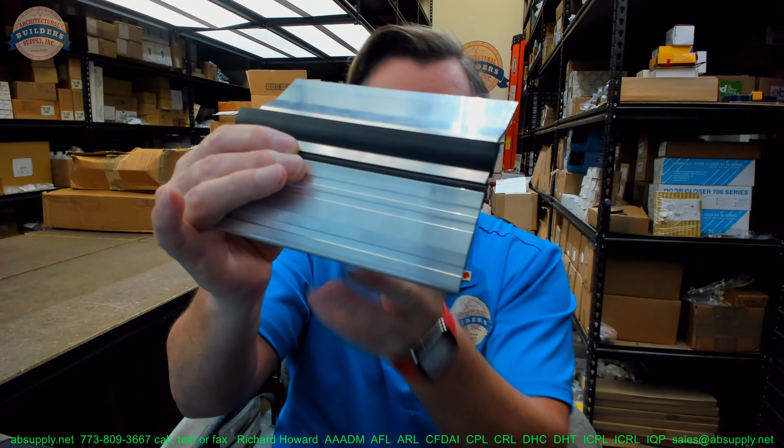This video is to bring you a closer look at the Pemko number 279x292AFGPK. So that's a part number. It's got 279, it's got 292, it's got A, it's got FG, it's got PK. Let's dissect it. So the 279 and the 292 are the constituent parts.

We'll dissect that. The FG happens to be that piece of rigid plastic right here. The A means it's all in mill aluminum finish, and the PK stands for the PemkoPrene insert here. This is what would be called a bump-up style threshold, where you're going to have the door make contact right with the PK or the PemkoPrene that's been inserted there.

This is a thermal break threshold is really what it is. It's a thermal break threshold that is built using constituent components to give you a confluence of the size that you need by utilizing two different parts that have that sort of preparation or that accommodation in the extrusion itself so that it could take that rigid thermoplastic that's here. The point of that is to retard the transmission of cold or heat or moisture from one side to the other. Very commonly used in cold climates.

I am witness to the effectiveness of thermal break weather stripping thresholds, thermal break hollow metal frames, and I can tell you that it's astonishing just on putting your hand on the outside of the frame and on the inside of the frame, or the outside of the threshold and the inside of the threshold. It's astonishing how much of a difference there is in just temperature that you can detect with your hand.

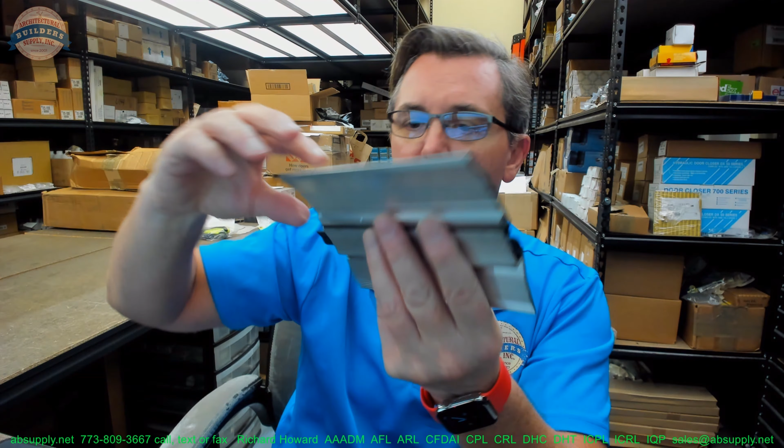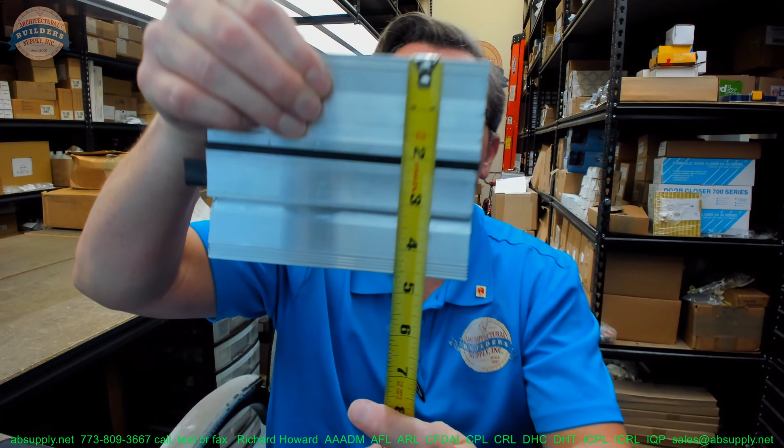Now the question becomes which is the 279 and which is the 292? I'm thinking that's the 292, but we'll take a look at that in a moment. Let's take a confirmation of the dimensional properties of this item. They have it at 4 9/16 overall width. Yeah, I'd say spot on. Maybe 4 5/8. It is certainly an attribute of thermal break thresholds that this would otherwise be 4 1/2 inch or something like that. But they have to make an allowance for that thermal break to be in there.

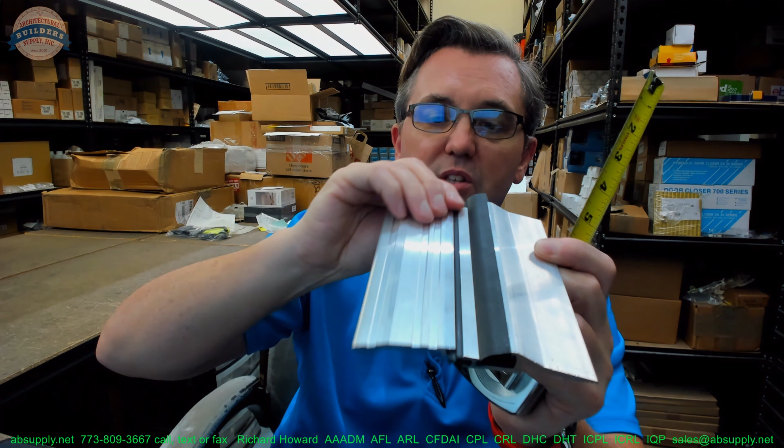Likely, more importantly, is the height. If you have a 3/8 undercut on your door, this could work out very well because the height of this leading edge material is just 1/4 inch. It's going to be 1/2 inch overall height here. So if you, again, have a 3/8 undercut, this could be quite perfect for that application.

Okay, this is also handicap compliant. Yes, it is. It's not listed as, but it meets the criteria for handicap compliance. It doesn't exceed a 1/2 inch height, and the rise over run, actually maybe it doesn't because of that PemkoPrene. You have to have a certain rise over run; you can't have more than a 1/4 inch height that is vertical like that. You have to have a 2 to 1 relationship.

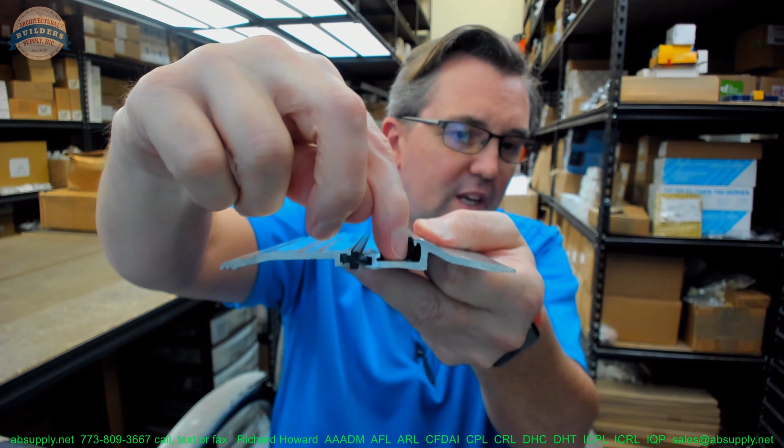And it's not listed as handicap compliant in our description, but we'll take a look at it. It could be if this were to fatigue and fail and no longer be there, that dimension here is what the problem would be. Okay? They're probably not going to calculate that PemkoPrene as a bona fide way to ensure handicap compliance. So we'll include fasteners.

This is listed in the site in lots of different lengths, everything from 2 foot to 8 foot lengths. You can have any custom length that you want, up to 16.5 feet is probably what they have the extrusions in. Be mindful that after you get longer than 3 foot, the length and the cost to ship are on an XY graph, and as the length increases, the cost to ship goes like that. So be mindful. Don't order 8-foot pieces because you want to cut them down to 30-inch each. Just order the size you need.

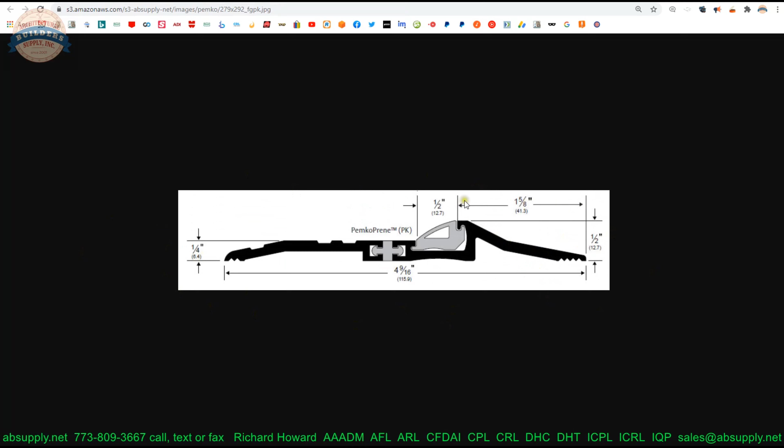Let's switch to the screen view now and take a closer look at the supporting documentation. Here's the item that we are looking at. We have an extended description image here showing all the dimensional properties. A lot of people will ask what that inside dimension is, or conversely what the outside dimension is. They call it a latching panic saddle threshold. I didn't mention that earlier. That's because this threshold is considered a latching panic threshold. And here's why.

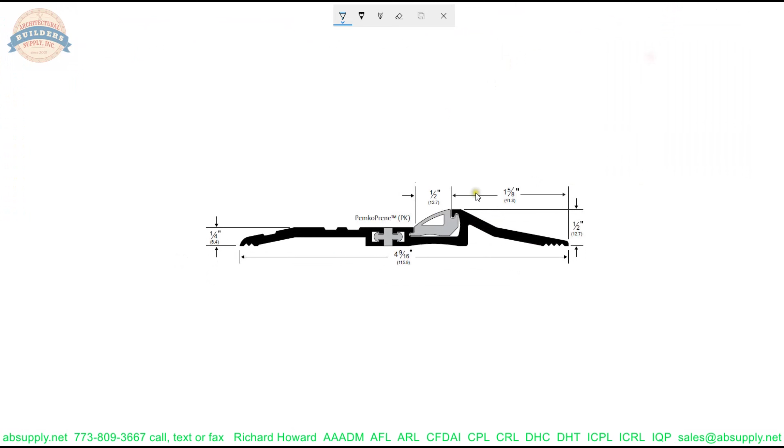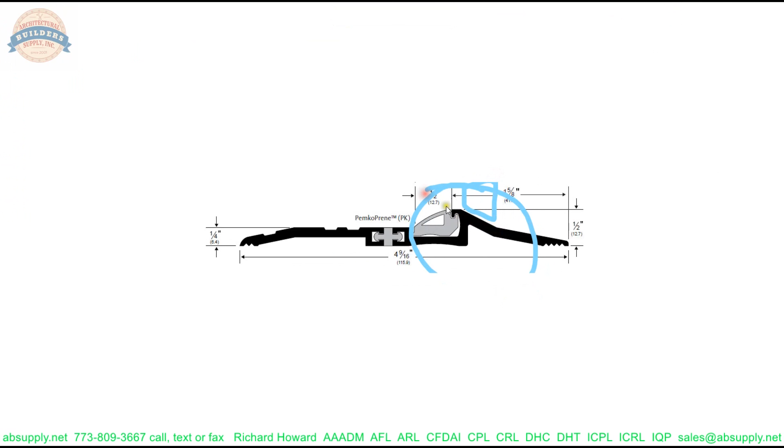If you have surface vertical rod exit devices, you'll have a Pullman latch style treatment here. This area right here can act as an area by which to retain the bottom latch of a surface vertical rod exit device. That's why they call it that, latching panic. So this would be very effective in an exterior application where you have pairs of doors that swing out.

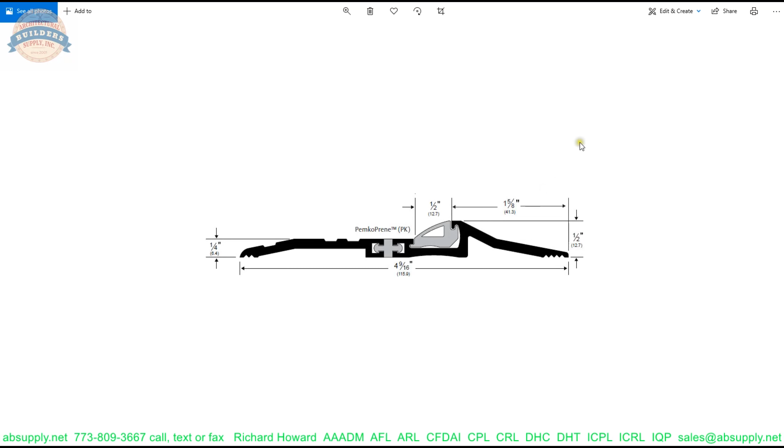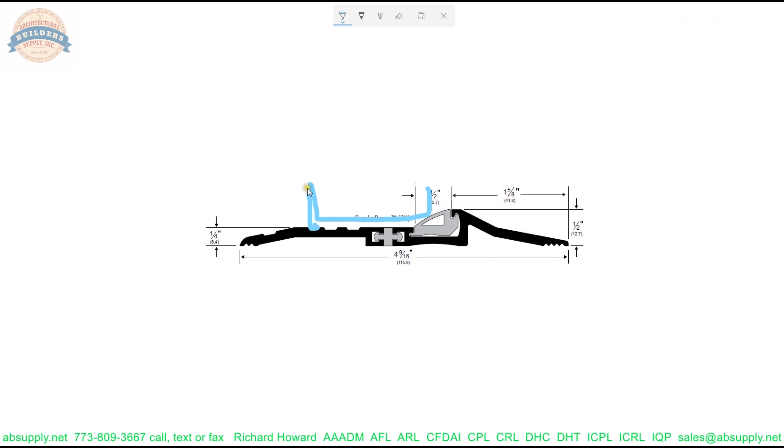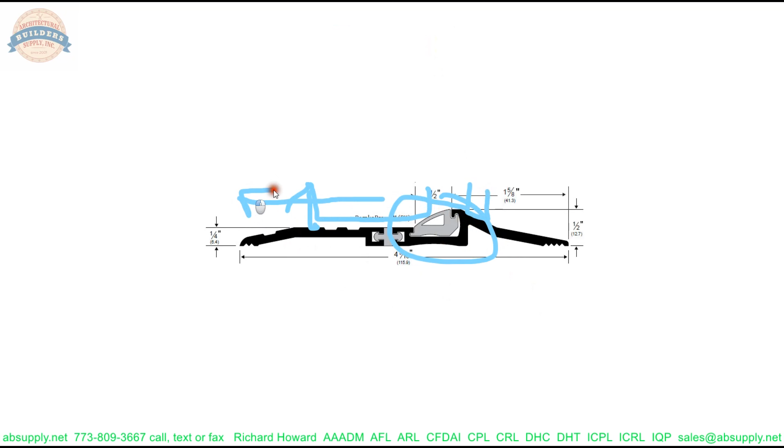You're going to have maybe 2 or 3 pair in this big box store. Your door is clearly going to reside in this area. You would be well served by adding a door sweep with an integrated drip cap. You've got the seal here. You've got your vertical rod exit device being latched here, and those doors swing out that way. This could be very effective at sealing your area.

Designed to work in conjunction with surface vertical rod exit devices. Also provide a door stop and a seal at the bottom of the door. You'll want something on the outside as well, in addition to that thermal break, would be my opinion. Supplied with 10-24 Phillips flathead machine screws. Nope, these are number 10 by maybe 1.5 Phillips drive flathead wood screws is what that is. Air infiltration tested, sound, smoke, fire tested.

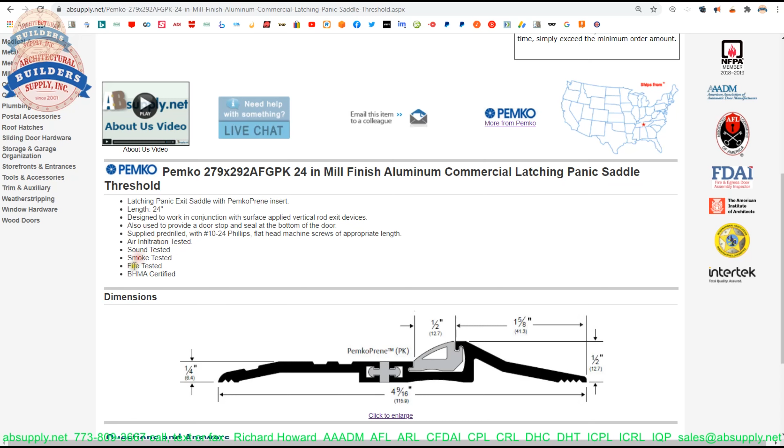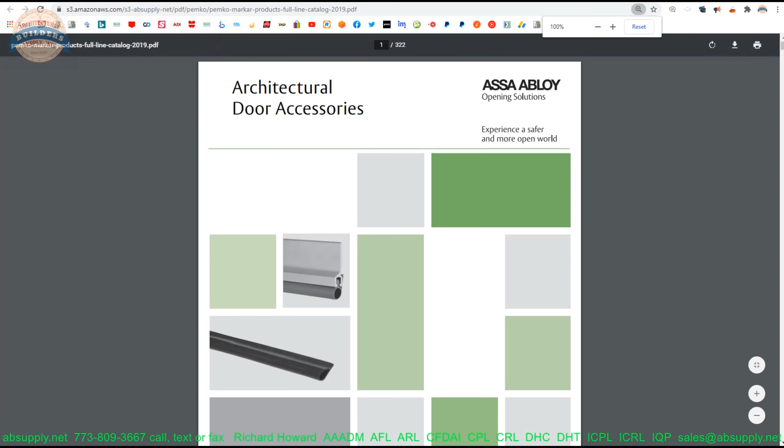Let's get to the manufacturer's page. There's a link below this video here. Let's click on that, and our page will come up. Let's fire up the catalog. And before we do that, let's copy our part number, 279x292. Let's open up the current product catalog. Do a find function on your keyboard for 279x292, and it will come up, and here it is.

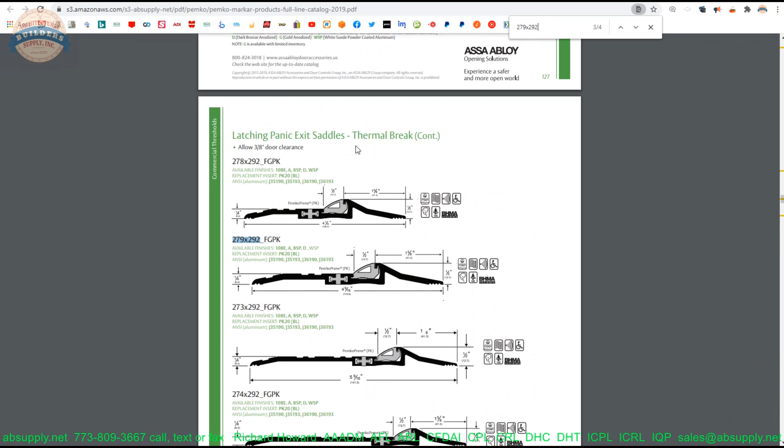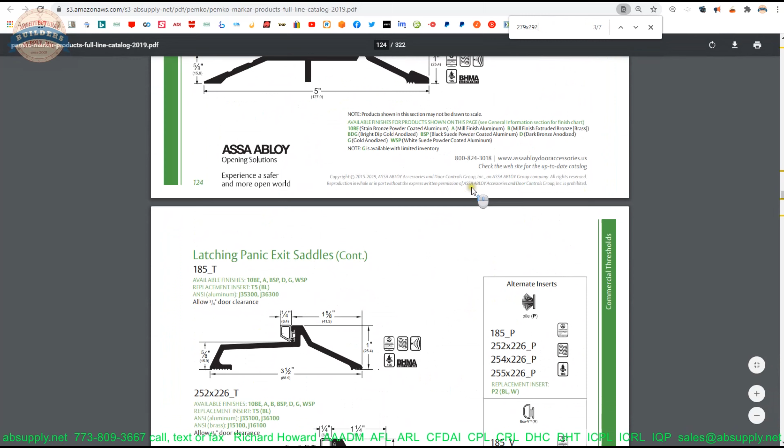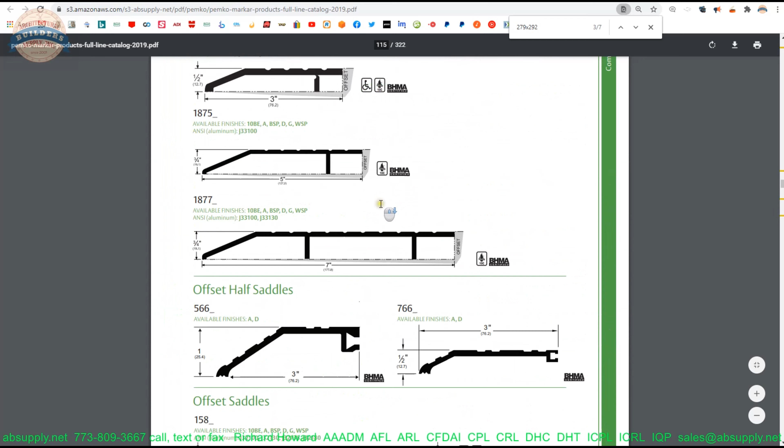So I still don't know which is which. I'm thinking that this is the 279, seeing the way that it's laid out. Let's take a look. Scrolling up to get to the half saddle thresholds to see what that part number is. Yeah, the 279 is the leading edge. Just a half saddle threshold, 1/4 inch high. Now the 279, I don't know that that is offered as a standalone threshold. Let's see if we can locate that. Pardon me, the 292 is what I'm thinking of.

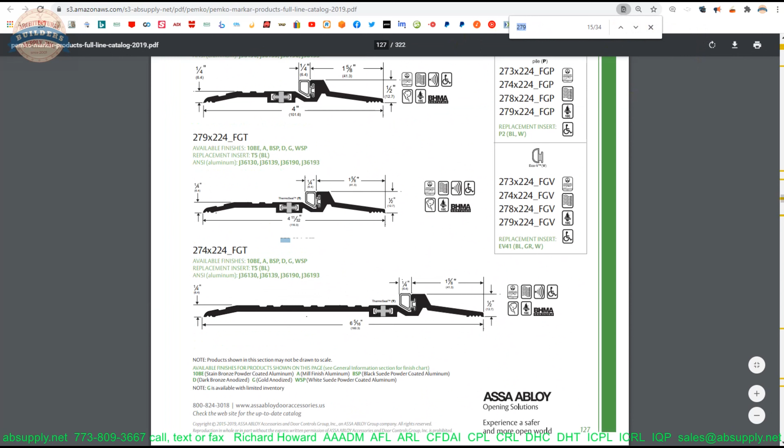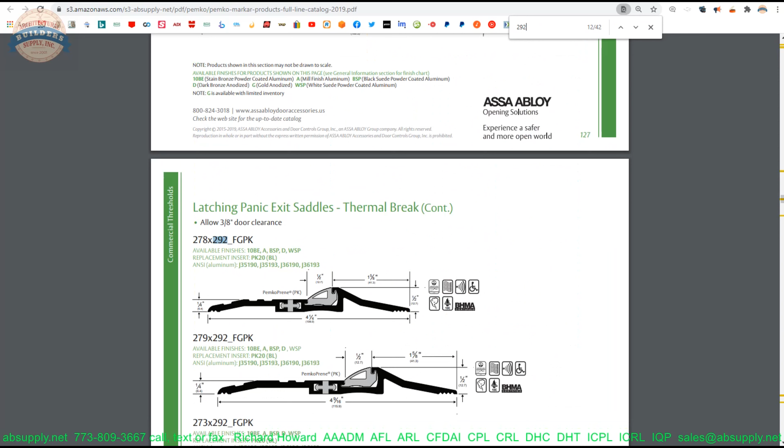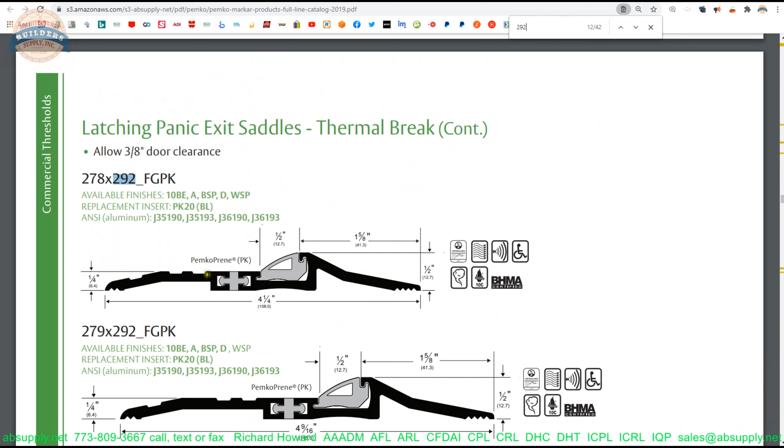Yeah, I don't know why they would offer that piece, that aluminum portion on its own. I don't see it having anything to it other than allowing it to be modular, where you can insert different widths. 279, 273 will get you out to probably 3-inch, and so on. Okay, so that 292 is just the back end. It goes along with whatever the leading edge is, even wider at that point.

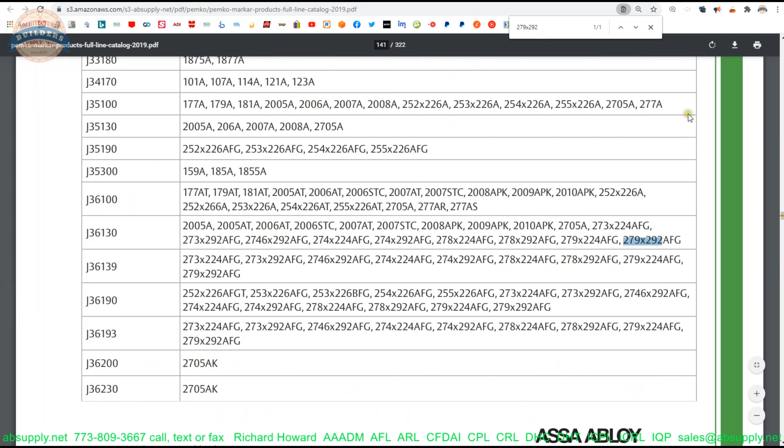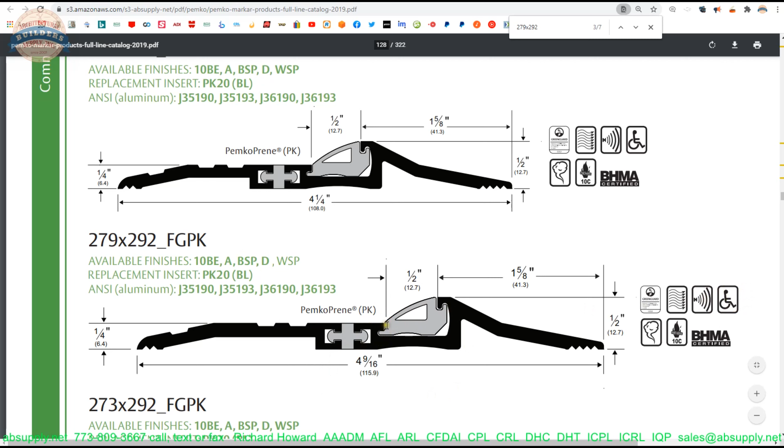Now, what you'll notice here on our 279x292, didn't mean to perform that search. Okay. We have different finishes listed. I did not list them all initially. Powder-coated dark bronze equivalent, mill, black suede powder coat, dark bronze, white suede powder coat. They tell you that the replacement insert is a PK20. That's right here. They do show that it's handicap compliant, so we'll need to update our page. It is apparently handicap approved. So there you go. That transition right there.

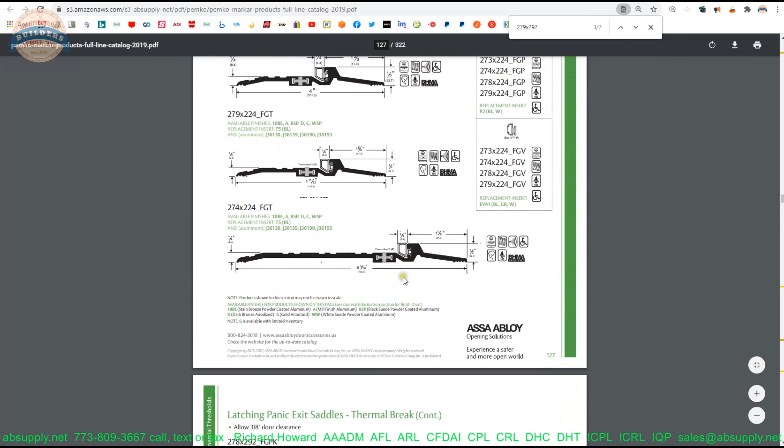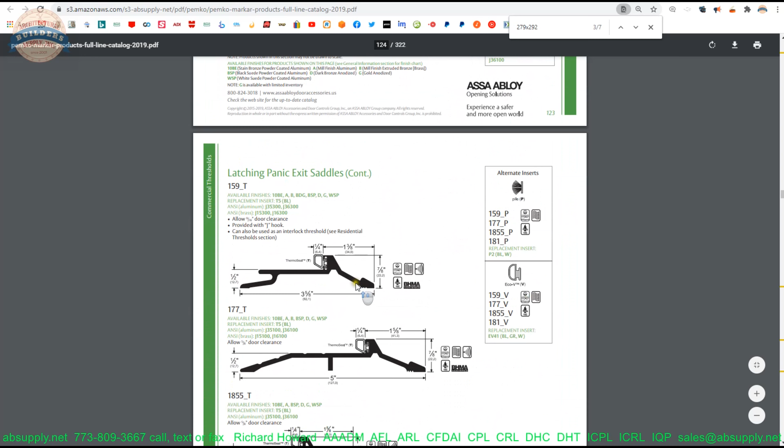This part of the catalog is very handy because it will allow you to review all such latch track, bump up, thermal break types of thresholds. There's lots of them. Pemko has an exceptionally deep, broad inventory of such products. Not a thermal break threshold, but one that I like a lot is the 159. It won't act as a thermal break. It will give you a seal on this part of the door and will allow you to add a hook strip on the outside to really prevent stuff from even getting underneath the door to begin with.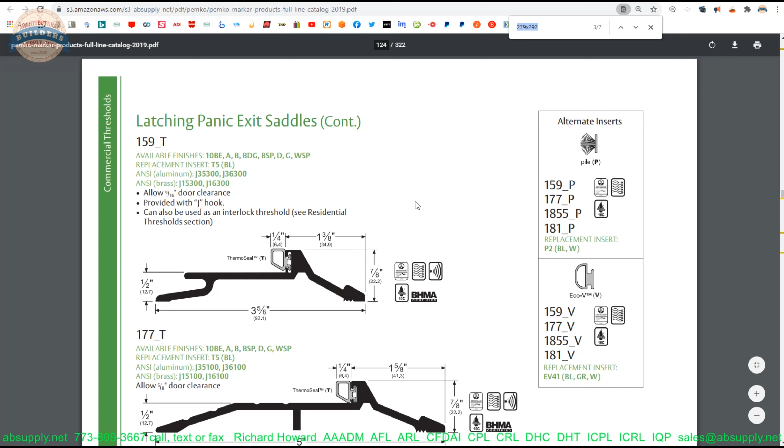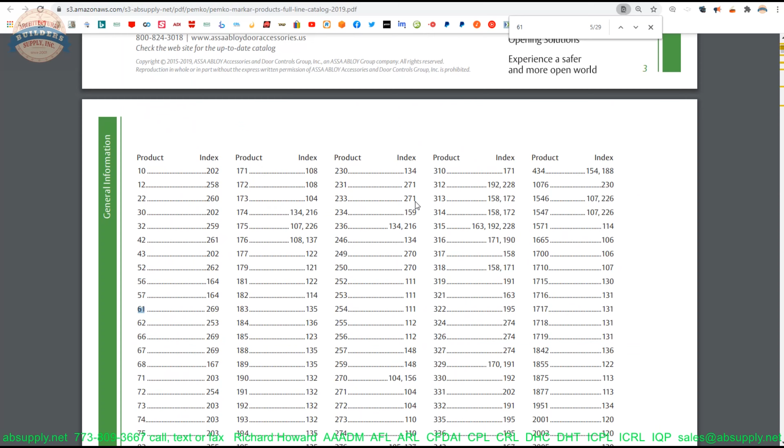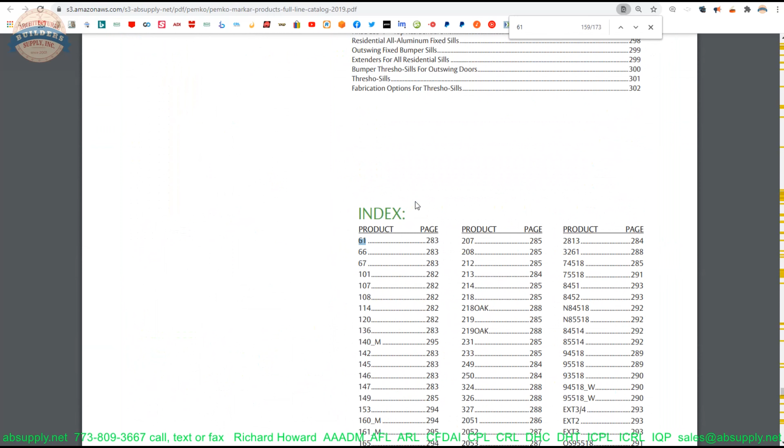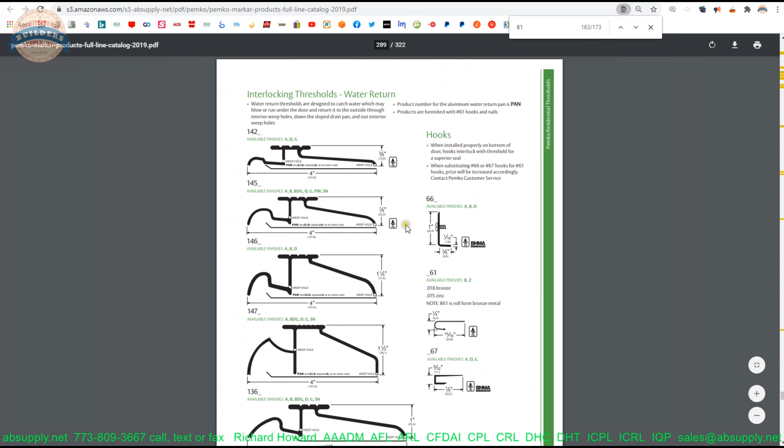Let's see here now. A hook strip for that. I'll pull up what that hook strip would be since I've started talking about it. Here we go. A surface-mounted L angle would be a 66A. It would be a good one to use for that. This catalog is over 300 pages of options when it comes to weather stripping. If you are not sure of what you need, there is no manufacturer's catalog that has more options in it than does the Pemko catalog. And I would urge you to take a look at it.

Okay, so very typical sort of threshold in the sense that it's a latch track or a bump up, but this confluence of thermal break and very short, that's a little less common, but extremely high performance is going to do the job very elegantly. Because it's only 1/4 inch over here, it will allow you to run your doors down a little bit longer. This would not be for use on a standard undercut on a hollow metal door. A 3/8 undercut would be the max that you'd want on that.

And either the project has specified an undercut other than standard, or you've inherited an opening or openings where you don't have the typical 3/4 inch gap that you would normally have. So you'd look at something like this. Maybe not thermal break, but something 1/4 and then a half at the most.

Okay. The name Pemko, again, synonymous with weather stripping. I am quite partial to them. They're good quality people, good quality product. They genuinely want to help. They genuinely are interested in the mutual success of the project. And for that, to them, I say thank you very much.